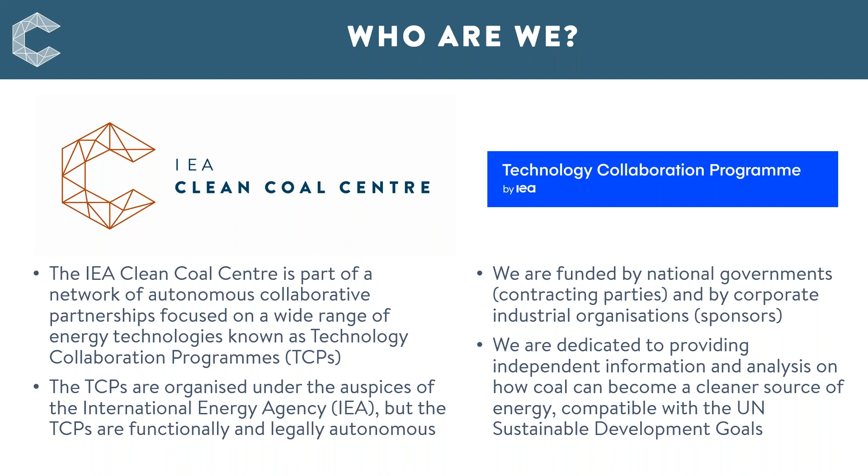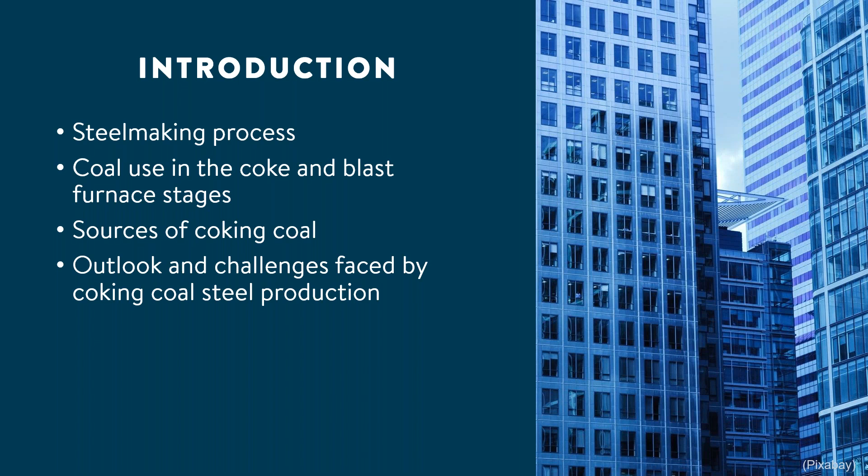Now, let me just give you a quick introduction of the talk for the next three quarters of an hour or so. I'm going to guide those of you who are less familiar with steel production and coking coal through the steel production process while avoiding chemistry and equations, so I'll keep it simple. I'll look at how coking coal is used as a source of carbon for the purpose of making iron. I'll look at where coking coal comes from and who the big users are, and finish off with examining some of the challenges and issues facing coal-based steel production. And towards the end, hopefully you'll understand more about coking coal and steel.

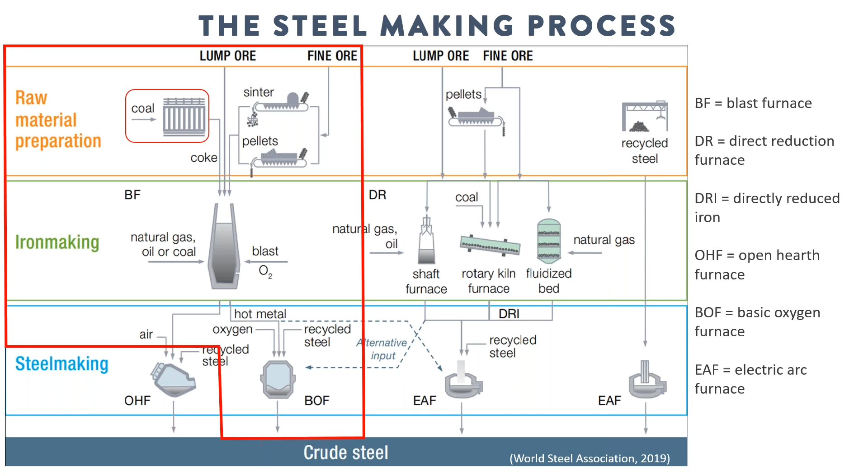Now let's focus on coking coal. This is effectively almost the end of the journey for coking coal, because this is where it gets converted into coke in coke ovens. These coke ovens are roughly anything up to 7 meters high, just half a meter wide, and anything up to 15 meters deep. If you imagine the sort of dimensions you have for a domestic toaster slot, it's kind of like putting coal into one of those.

The ovens can be top loaded or side loaded, and 30 to 70 of these slender ovens can be arranged side by side to form what we call a coke battery. One or more batteries can be used in parallel, depending on the scale of the plant, producing up to several million tons a year. Each oven is sealed, and the coal is then heated to 1000 degrees centigrade, or roughly 1800 degrees Fahrenheit, and done in the absence of oxygen.

Coal then releases volatiles and moisture without combusting them, and these volatiles are then captured and reused elsewhere. After 12 to 36 hours of heating, the coal has turned plastic, released its volatiles and moisture, and then it cools into a mass with a very high carbon content. Low rank steam coals can be used, but generally lead to poorer quality cokes, albeit cheaper to buy, but smaller amounts can be used without doing too much harm.

Now, the coke is then extracted and quenched before it goes to the blast furnace, and it's important for the coke to be a stable mass rather than a friable mass. It needs to form a structure in the blast furnace that permits gases to pass through the bed of coke and ore of hot solid material for reduction of the ore to take place.

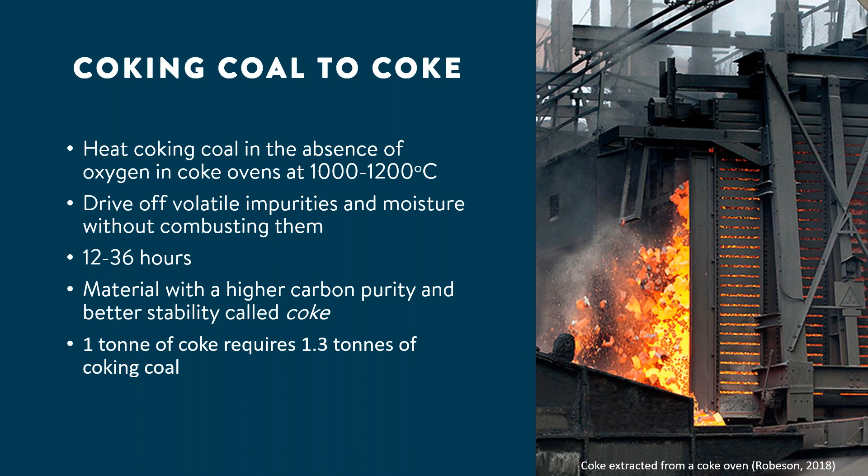Now, mineral matter can be a problem in coking coal. An internationally traded coking coal should be less than 10% ash because a rise in ash content effectively requires more coal throughput per ton of coke, requiring more energy and increasing the need for maintenance in the coke ovens. Steelmakers are always keen to find alternatives to coke to reduce costs, but also to prolong the life of their coke ovens. And so few alternatives exist that can replace coking coal in terms of quality, abundance, and cost. But as a general rule, 1 ton of coke requires 1.3 tons of coking coal.

Now that carbon monoxide then migrates upwards through the layers and the pores in these layer structures, forced by extremely strong currents of hot air from the tuyeres at the bottom. And this reduces the iron oxide in the upper layers of the furnace. In the middle, limestone decomposes and combines with silica and silicates in the iron ore to form slag, which is then tapped off to waste. The molten metallic iron or pig iron, along with the molten slag, then descend through the layers and are tapped at the bottom of the blast furnace.

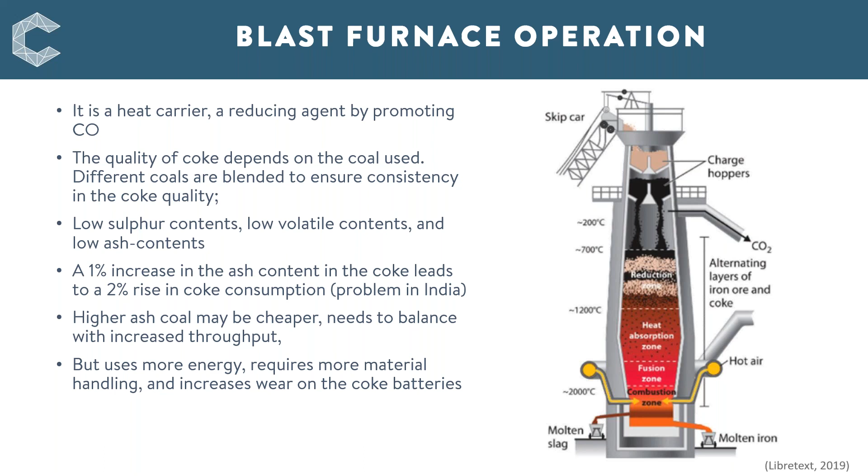Just a quick discussion on pulverized coal injection. Aside from coking coal, this PCI coal is a finely milled steam coal that's injected directly in the base of the blast furnace near where the air enters at high velocities. The PCI coal is generally a low volatile bituminous steam coal with very high heating values. I've seen heating values of anything 7,000 to 7,800 kilocalories per kilogram published versus say 3,300 to 6,700 kilocalories for a typical steam coal.

A PCI coal will be very low in sulfur, so less than 0.5% sulfur content. It should have low ash content, less than 10%. Although, as I said before, lignites and anthracites can be used in the process, but more in limited amounts. And typically 1 ton of PCI coal replaces roughly 1.2 tons of coking coal in the process. And this is good because, as I said before, reducing coking coal throughput in the coking process reduces wear and tear on the coking ovens, reduces energy and therefore emissions associated with coke production.

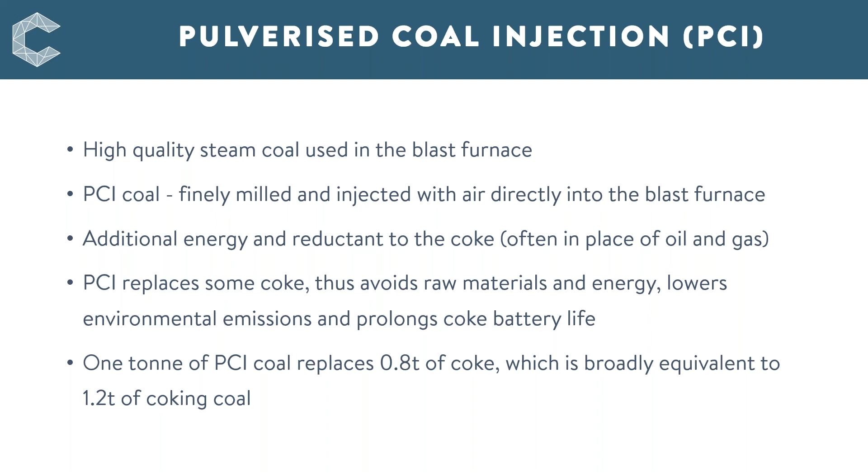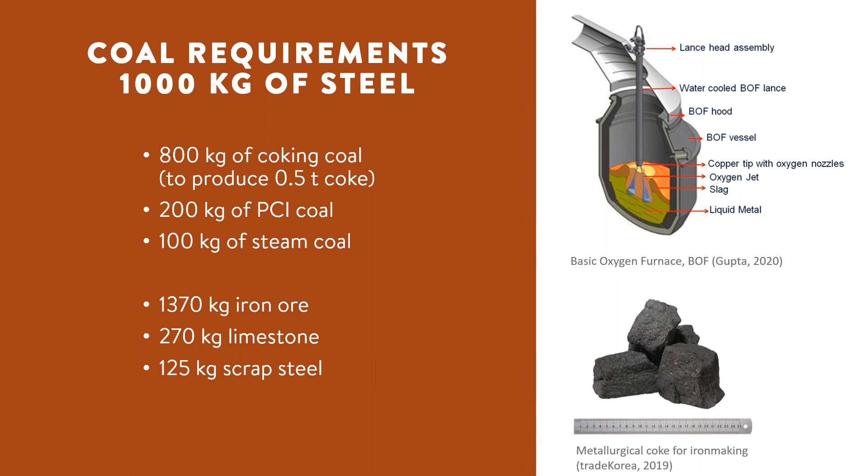Like the blast furnace process, the interactions between the oxygen, the carbon, the ore, and the additives and other compounds is a very complex process. There's a whole series of chemical equations involved in that, but I won't have time to cover that here. But overall, by this stage, the integrated steel mill has probably consumed about 800 kilograms of coking coal, up to 200 kilograms of PCI coal, maybe 100 kilograms of steam coal to produce a single ton of steel, as well as all the other raw materials that you can see here.

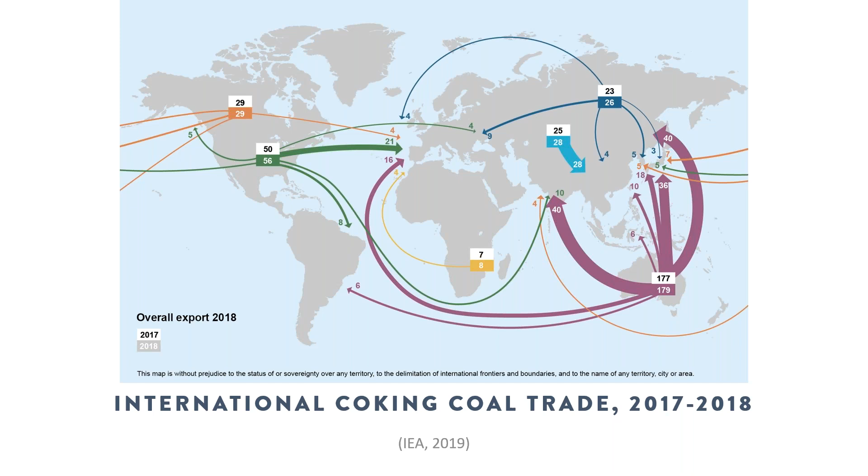The thickness of the arrows here shows in proportion to the volumes that are exported. And so you can see here clearly that the leading exporter in the world is Australia, which accounts for roughly 55% of the trade that you see in this map. And now the interesting pattern is where it's going. Here is the leading importer and the largest overall consumer of coking coal, because this is the region that's the leading producer of steel as well. Other trade regions include Europe, chiefly OECD Europe, and also Turkey as well, which is another major importer into that region.

Now, if we turn to the main coal exporters, the table shows the same data from the previous map, along with their relative production levels and imports as well. The exports are negative here, as you see, because it's a balancing against the positive addition in the country for production and imports. The producers here export the majority of what they produce, with the exception of Russia, which actually retains most of the coal that it produces for domestic steel production. But what's most interesting, if you look at the bottom two rows, is the emergence of these promising exporters, such as Mozambique and Mongolia.

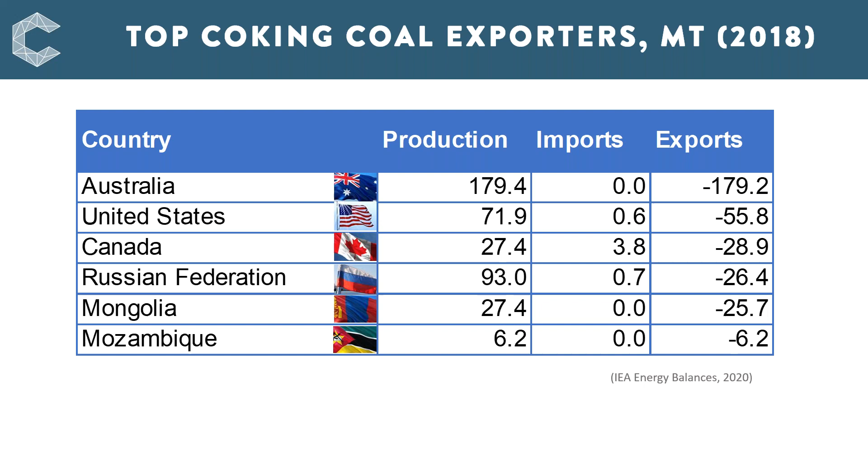All of Mongolia's exports are railed over land into China across the border, into the provinces close to the Mongolian border. And Mozambique ships most of its coal to Asia with very close shipping distances to India in particular. Both countries are recognised as having vast reserves of very high quality, low cost coking coal, although they have faced their challenges because these two countries have emerged in the last 10 years, during the period of the commodity crisis. So these countries have done very well to hang in there and increase their business. And all of these countries are discussed in much more detail in the forthcoming reports with maps and details of production and companies operating here. Now, turning to the major importers of coking coal, which are listed in the table on the left here.

Asian countries account for 6 of the 10 top importing countries of coking coal. And Asia, as I mentioned before, was the major driver of demand for seaborne traded coal, coking, and steam. China is the world's top importer, followed by India, Japan, and Korea. However, the supply circumstances are slightly different for these countries. 90% of China's coking coal is actually produced domestically, and the rest is imported, as you can see here. Yet it's still the top importer in the world.

So events that happen within China in its domestic coal market and steel markets certainly have an impact on the rest of the seaborne market as well. India relies on imports for 50% of its supplies, so it relies pretty heavily on imports, surprisingly, despite the fact that there is an abundance of coal in the country. It's just not necessarily of the quality or the coking variety that the country requires.

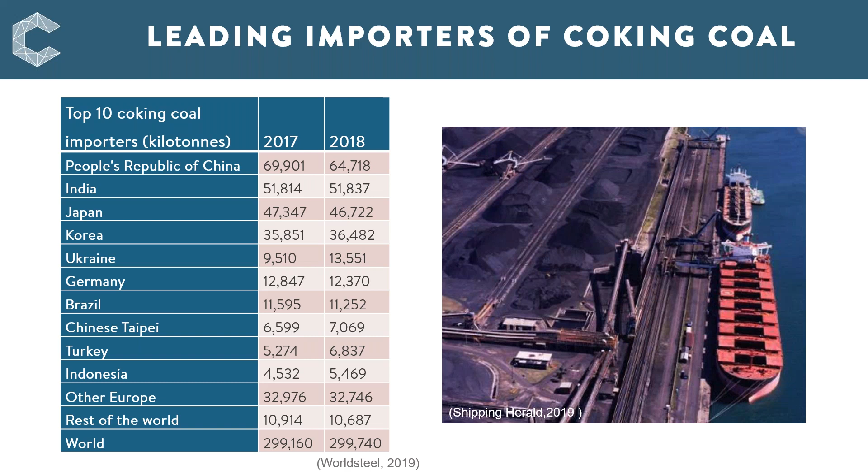But Japan and Korea, however, have an entirely different supply profile, where nearly 100% of their coking coal is imported and comes from the seaborne market. Now, if we look at the other major importers, Ukraine, Germany, Turkey, and Brazil, they're also major importers, but again, they rely heavily, with anything up to 90% of their supplies coming from the seaborne market as well. In total, roughly 300 million tonnes was imported in 2018.

So we've discussed the steel making process, and we just touched on coking coal trade. Now let's turn to broader steel production trends and see what it could mean for coking coal demand. World steel production has doubled since 2000 to 1,870 million tonnes. More than 70% was produced in Asia in 2019. 2019 saw a major boost versus the previous year, an increase of almost 6%. Although by the end of 2019 and the beginning of 2020, we've seen the trend take quite a downward trajectory, which we'll discuss a little later.

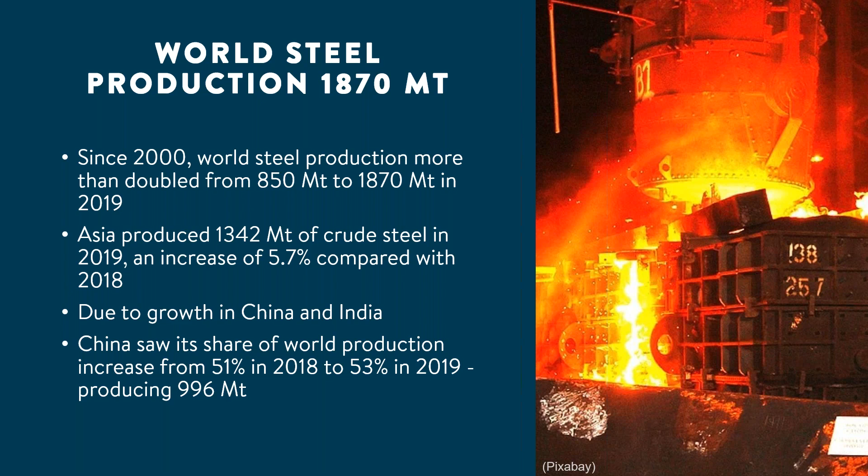The growth in steel production last year was attributed mainly to the big 2 non-OECD Asian economies, China and India. And China actually increased its share of world production last year from 51% to 53%, meaning its influence on world steel and coking coal markets can be felt even more. Now, these tables break down the proportion of steel that is produced by different methods. So we've got here along the top the blast furnace basic oxygen, electric arc furnace, and the open hearth furnace methods of steel production.

And if we go straight to the top at the EU 28, you can see the EU still gets almost 60% of its steel from the blast furnace method. But the region we want to look at further down the table is Asia, where 80% is produced from the blast furnace basic oxygen method. Now, if we look at the bottom table, which breaks down the separate countries, I'd just like you to look at India for a moment, which seems to be an outlier for Asia.

So even though I said that in Asia 80% of production comes from the blast furnace method, India produces 45% of its steel using the blast furnace method, but most of it actually comes from the electric arc EAF process. India makes use of direct reduction iron making, so it reduces its iron ore in a very different way and doesn't use a blast furnace. Although it still uses coal, it actually reduces iron ore using a solid state process called direct reduction.

But the future of DRI is somewhat mixed. Although India is one of the leading producers of sponge iron using DRI, along with Iran, China has recently closed a whole swathe of DRI production capacity. So it's contracting. But DRI is also one of the other promising possibilities for future lower carbon steel manufacturing. We'll talk about that a little later.

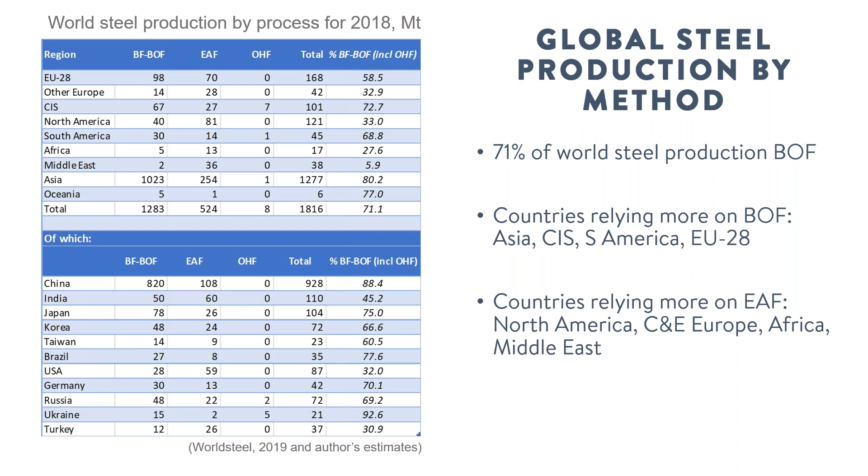This is a chart that shows the plant utilization of steel plants fluctuating since 2000 to 2018 as a percentage of total production capacity. Now, in the past, the steel industry has suffered from excess capacity, with capacity perhaps increasing faster than demand in past years, leading to a fall of plant utilizations between 2006 and 2015. However, China took steps to sort this out, and the rationalization of the steel industry meant that the utilization then was boosted from 75 to 85%, pushing up the worldwide average of plant utilization.

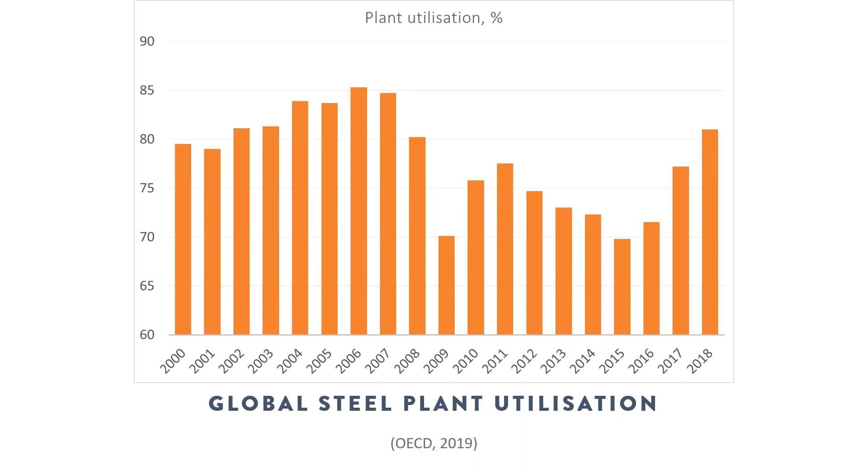This was done through the closure of inefficient, more highly polluting steel plants, creating sort of the mega mergers of some of China's largest steel companies, forming these gigantic steel companies, and these are all discussed here in the forthcoming report. So the drive to have a much more modern, more efficient and cleaner steel industry has meant that the utilization has also been boosted, and we've got a much more productive industry worldwide.

Now, I talked about the events in late 2019 into early 2020, which, as we're more than aware, have created a shock to society and the world economy from the COVID-19 pandemic. No one really knows for sure where the world steel sector is going to go and when it will return to pre-COVID normality. But overall, we've seen steel production fall by roughly 1% in the first quarter of 2020 versus the first quarter of 2019.

Looking at different regional changes, Europe appears to have taken a more severe hit than some of the other regions. And a sustainable recovery or a stagnation in steel production is still difficult to foresee. The prospects are literally changing on a day-to-day basis. The prospects of steel production will really depend on the exit strategies for countries, and of course it may occur in a staggered fashion with different countries opening up and going back to normality at different rates. China appears to already be going back to normality quicker than others.

Output from steel using sectors, the automotive sector, real estate, manufacturing, engineering, has also been somewhat mixed. This will be dependent on quantitative easing and the effects of any economic stimulus, and of course, as I've mentioned, the lockdown exit strategies and their impact on heavy industry. Again, as I said, it's difficult to foresee.

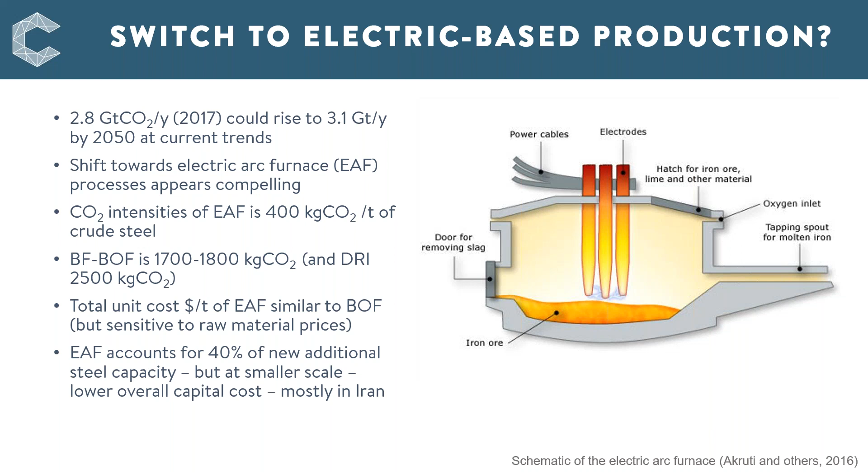Now, going back to the electric arc furnace, switching to EAF isn't so simple. Scrap steel is widely available, but the supply is not limitless. According to the Steel Recycling Institute, the recycling rate in 2014 was around about 86%, approaching 90%, and steel is considered the most recycled material in the world. The end product recycling from, for instance, motor vehicles is 95%, and 90% of the steel in appliances and white goods is also recovered as well.

So with recycling rates so high from these bulk sources, to increase electric arc furnace production needs yet more scrap metal. And so one has to manage this very carefully. Where will it come from? One can identify new sources, but establishing a network and system for collecting and processing scrap steel, because it still contains impurities, paints, and so on, on a large scale is still a massive challenge.

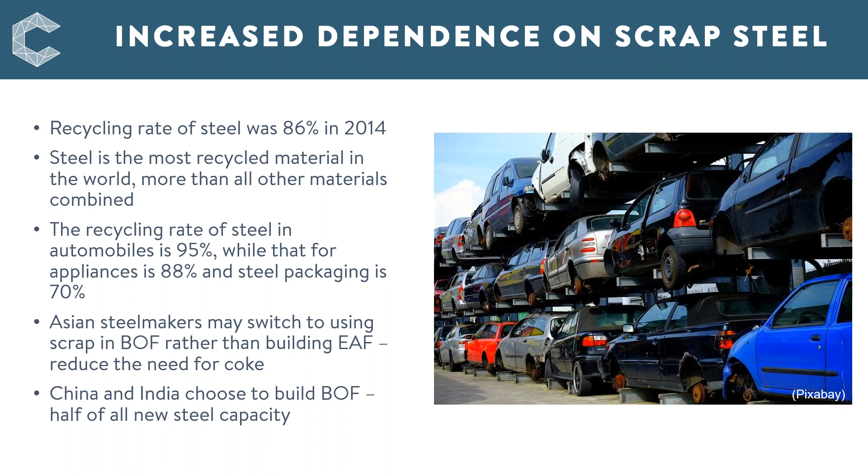Scrap metal has its own market dynamics, its own pricing structure, and its own economics. For example, in China, when the price of scrap steel is high in the country, electric arc furnace plants actually use more pig iron. When the price of scrap is low, more scrap is then used in the blast furnace basic oxygen system. And so the scrap industry itself is its own profit-seeking business, and will direct steel and attract markets based on the relative cost of scrap versus iron ore, wherever one is in the world. So there's no simple answer. A simple switch to EAF from blast furnace isn't straightforward.

Now, looking to the long-term future, coal-based steel production is not going to disappear. Urban development is a significant driver for the demand of steel due to the need for infrastructure and housing, bridges, commercial buildings, and so on. In 2018, more than half of the world's 7.8 billion population resided in urban areas. By 2050, the United Nations predicts the world population will grow to 9.8 billion, and 68% will live in urban areas. So it's a massive increase in urban population, and a lot of this is going to happen in Asia.

Industrializing Asia, as we saw before, relies 80% on blast furnace and basic oxygen steel production. Of course, it can import steel from other regions, and it can develop more electric arc furnace as well. But the electricity supplied in a lot of Asian countries is still fossil fuel based. It's not just coal, it's natural gas and oil as well. So again, the answer to decarbonising the process isn't simple, and we can look at some of the options in a moment.

According to the World Energy Outlook, under their sustainable development scenario, the energy transition towards a greater role for renewables is a very firm part of the future energy mix. And part of this solution will be the addition of 1,800 gigawatts of new wind power capacity in coming decades. This is a top-end estimate, of course, because it's the sustainable development scenario. But nonetheless, when one considers that 90% of a wind turbine mast is steel, and steel is used in almost every other part of the turbine, coal-based steel could still be a very important part of supplying the raw materials for the energy transition.

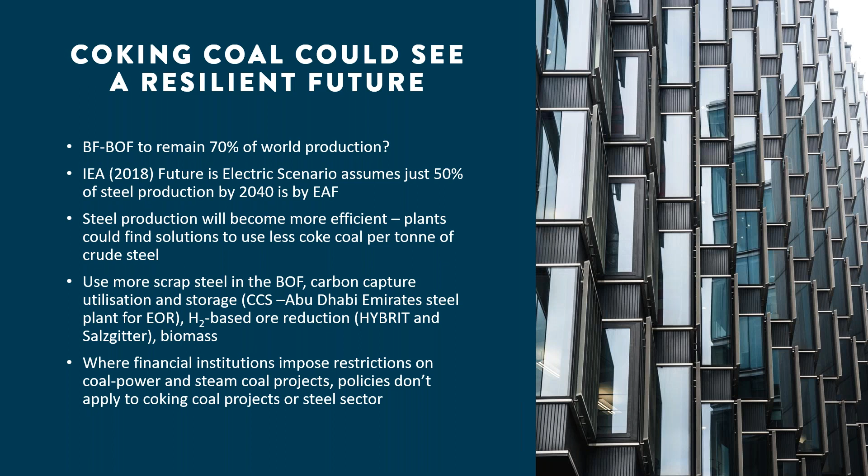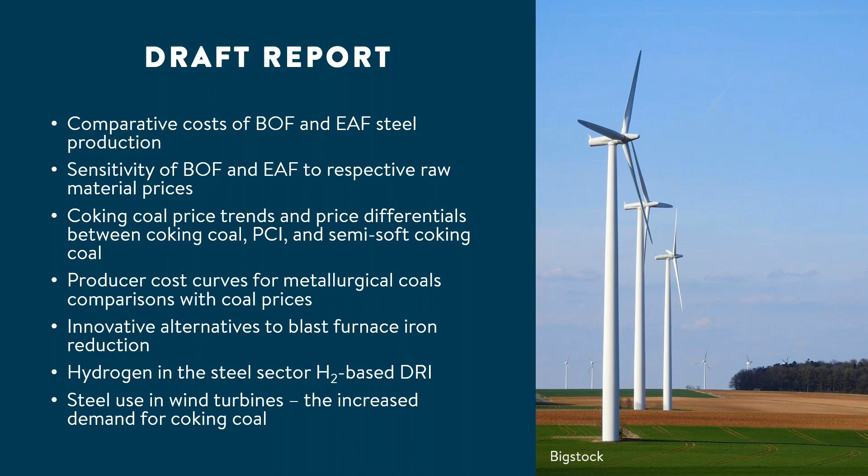I also look at the cost curves for the major coal exporters, to see which countries are the lowest and highest cost producers of export coking coal. And there's also country by country analysis of coking coal exporters and importers. There's more detail on the decarbonising of the steel sector and, of course, its role in power generation, and it goes into the assumptions behind my calculations. So we finish with the key messages before I hand over to Benedict and the questions.

So here we have basically: coking coal is a critical raw material used for reducing iron ore. Most of the world's steel production is based on this coal-based method of blast furnace and basic oxygen. Nearly all the growth in this respect is in Asia, and that's where the coking coal trends are really being driven. The steel industry has undergone a great deal of rationalization and is probably more efficient now than before, with utilization rates increasing. But of course, we've got new capacity coming online, so those utilization rates may well change again, depending on whether steel production comes back to normality in due course.

The shift to electric non-coal-based systems isn't straightforward. There are many other market and technical factors to consider in different regions. Of course, it will be region specific. And really, coking coal demand will not disappear, since it's used as a processing product; it's not a combustion fuel. Nonetheless, there will be innovations in the process, and I shall now finish there and welcome questions.

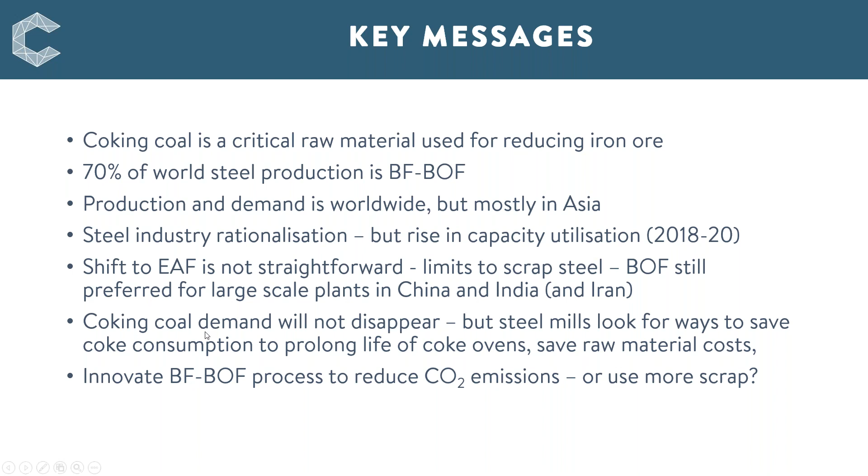We can see the recycling steel further increasing as we move away from plastics. The challenge is that collecting and recycling facilities are not central. We need to incentivize scrap collectors. Indeed, in fact, the incentives in China to recycle are highly variable. There are anything up to 20,000 small-scale collectors in China and a group of larger scale. But if the money and the incentives aren't there, there'll be no collection. There's no incentive to buy and sell.

It's rather like, for those of you who may be more familiar with oil refining, the crude oil going in and the refined products coming out, if the price differential isn't attractive, the incentives, of course, disappear, and it makes the situation more difficult. But thanks for that comment. So I'll just scroll down.

Other than the energy consumption of the different technologies, are there differences in the quality of the final steel produced? Absolutely. I believe that the high ash coking coals in India are a bit of a problem, and in their direct reduction process as well as blast furnace can cause quality issues in the pig and sponge iron. Of course, you need to get the quality up to a certain level. You need to get out oxygen as well as the silicates using lime and limestone in the various stages of the processes.